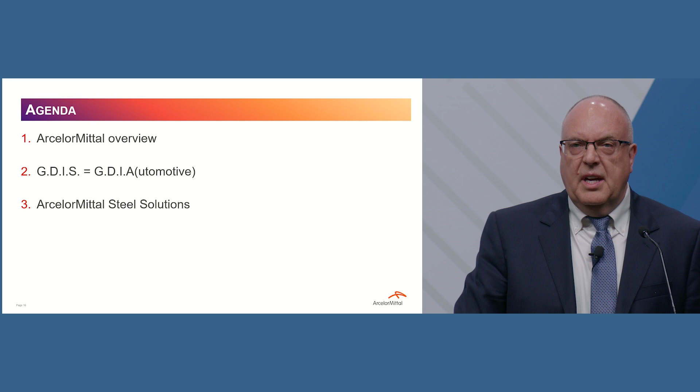So let's jump right in, I've got a lot of material to cover. Three main topics I want to cover today: a very brief ArcelorMittal overview for those who don't know our company; why we strongly believe great designs in steel are great designs in automotive, and that steel will continue to be the material of choice. I'm probably preaching to the choir here, but I'm sure some of you are challenged to look at other solutions, and we want to emphasize again what we offer in steel. Lastly, I'm going to spend a lot of time on what we do at ArcelorMittal. We believe, and we are, the leading technology provider in the steel industry, and I want to talk about all the solutions we're providing for our great customers.

Okay, so a little background for those who don't know us. We are still the world's leading steel and mining company. We have manufacturing in 15 countries, and we sell to more than 140 countries, 58 million tons. Now this is crude steel—I'll highlight this because I'll talk differently in a second. That 58 million tons doesn't include our large joint venture in India, which isn't consolidated. That would be another 8 million tons of crude steel, and it contributes to our other results because it's a strong performing asset.

We've got a lot of employees worldwide, more specifically 14,000 of them in North America. You can see our financial results are strong, our debt is low, and even with significant capital expenditures these days, we're generating $2.9 billion of free cash flow. So we have the ability to support our customers and work on all the technologies you need.

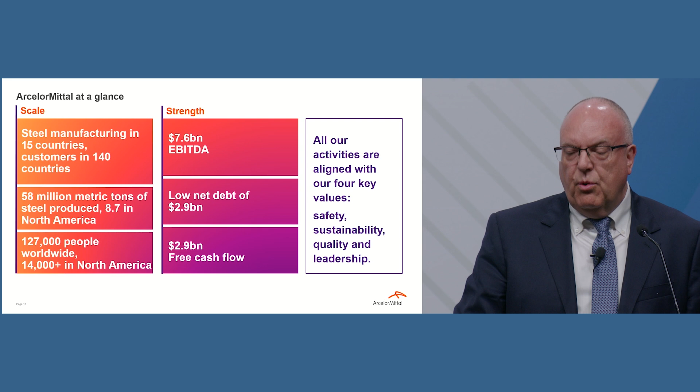And I do want to emphasize, because this will come across through everything we do, our four key values of safety, sustainability, quality, and leadership.

Okay, so if we look at the things that really drive us forward—I mentioned sustainability a second ago. We do have a group-wide net zero target. You can also see our global 2030 targets for CO2 reduction, and more specifically in Europe, where we are leading in decarbonization. Health and safety is our #1 priority, and it has been since our inception. And there's a 2030 target to double the number of women in leadership positions to greater than 25%.

Now on the innovation side, this is where we believe we really separate ourselves from the competition. We have more than 100 R&D programs underway as we speak. More than 200 trademark products existed from our company in 2023, and 38 new products and solutions were launched. We're launching at the fastest rate we ever have. People think steel is a mature industry.

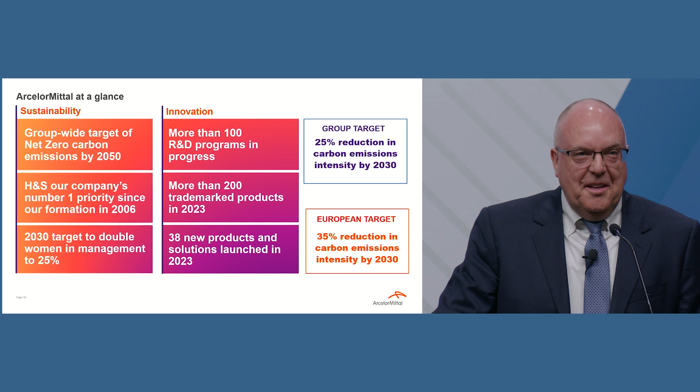We're proving it's not. Now I want to talk a little bit specifically about North America. I covered some of these facts a second ago, but it's a little funny—I think in last year's conference people were talking about our demise in North America, or maybe our exit, and I want to emphasize nothing could be further from the truth, okay? North America is a critical market for us. We may have sold some assets, but we're reinvesting, and I'll talk about that in a second.

We've got 14,000 plus employees in North America, and on the shipment side, we do bring some slabs into North America to finish because we have more finishing capacity here. We shipped 10.6 million tons last year.

So if you look at some of our major assets in North America: we have a joint venture, a very large steel plant in Alabama. We have ArcelorMittal Dofasco in Canada, again a very large and auto-focused steel asset. We have ArcelorMittal Mexico, which has been making a lot of high-strength slabs for our other operations, but we've invested to go downstream into hot roll products, and we're studying further investments as we speak.

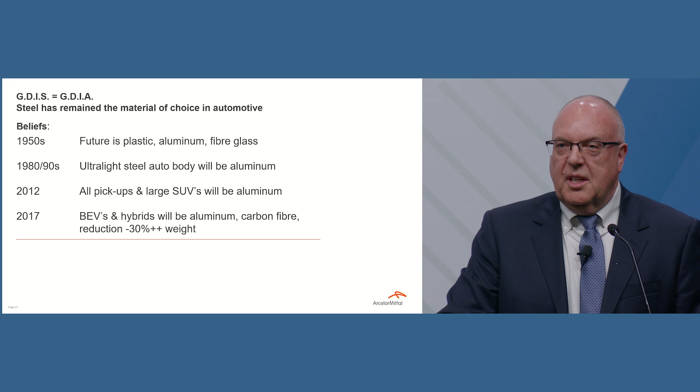And then, of course, I was on another auto body conference in 2017. It was quite an entertaining one for me, being the only steel guy there. But there was an aluminum company and 3 automakers, and all of them were emphasizing how vehicles, especially BEVs and plug-in hybrids, had to have 30%, 40%, even 45% weight reduction in order to be a good design. And I was just amazed at some of the exotic solutions they were coming with. Only 2 years later, the German OEM at the table sold their carbon fiber subsidiary, and none of these weight reductions came. Steel delivered them significant weight reductions at more cost-effective abilities.

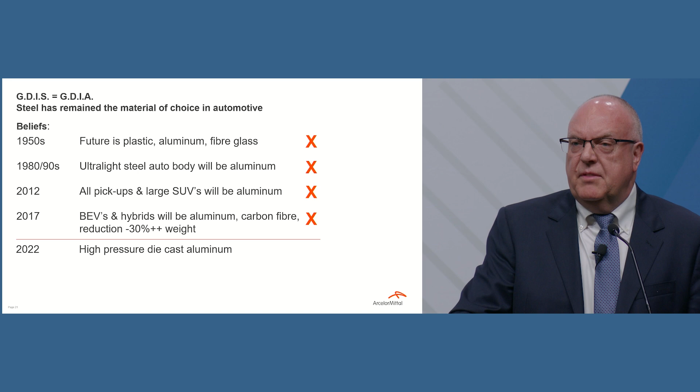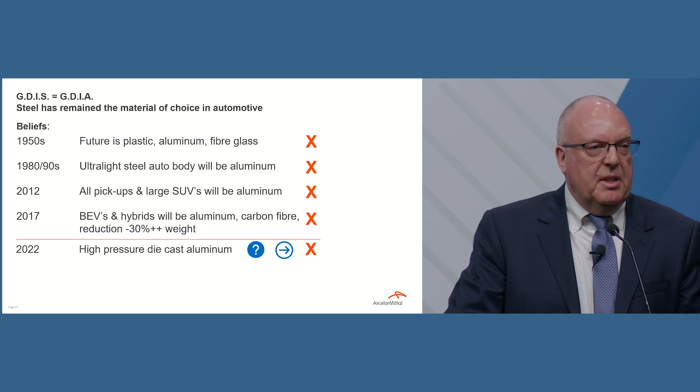So we've been able to fend off all of these competing material solutions over the years. And of course, there's always one coming. So here we are today. Many automakers, especially for BEV vehicles, are talking about high-pressure die-cast aluminum. What do we think is going to happen? Well, we're here today to say that the steel industry has the technology and the responses, and that if we look back maybe 5-7 years from now, you will see once again that steel remains the material of choice in automotive. So all of those challenges over the years, steel still makes up, this is our analysis, it's aligned with experts globally, more than half the vehicle content.

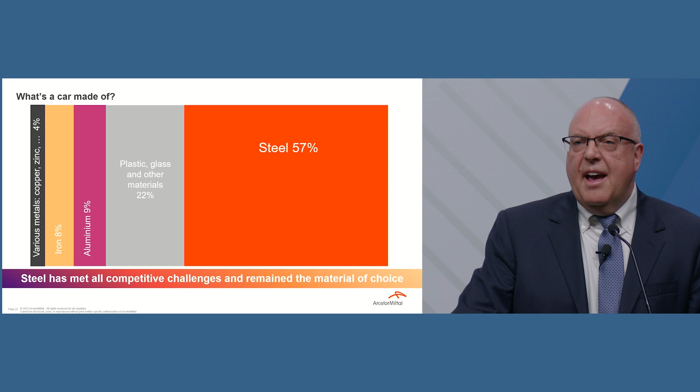Okay, so automakers, we realize we have to understand your challenges if we're going to have good solutions for you. The transition to BEV brings a lot of challenges. It brings a lot of opportunities as well. So obviously we're all aware of the increased mass. We're aware of what that means in a crash. It means we have to protect the occupants, but now we also have to strongly protect the batteries. We have to absorb all that energy. It's a very challenging vehicle design to come up with, but it also has opportunities.

The skateboard design gives you the opportunity to assemble differently. It gives you the opportunity to assemble in a more modular fashion. And these are some of the opportunities we know that all the automakers are studying. And you're also looking at all of the technology you put in these vehicles, which is massive and very expensive, and the fact that as we come to more autonomy, you will redesign the interiors to give customers more of what they want. So this is a very, very challenging time for automakers, maybe the most challenging time in history.

But we realize that your biggest challenge with all of this is to meet these goals in a cost-effective way. And that's where steel is going to continue to be your answer.

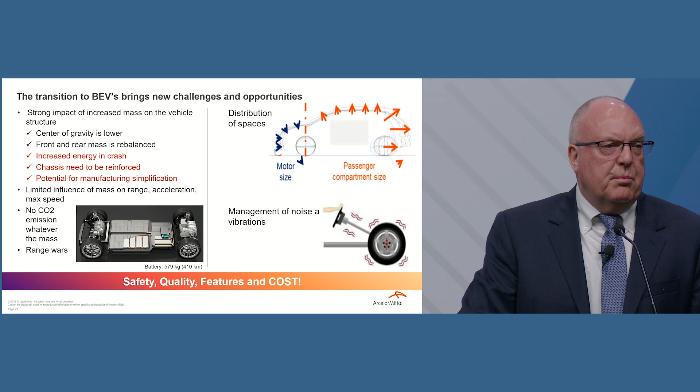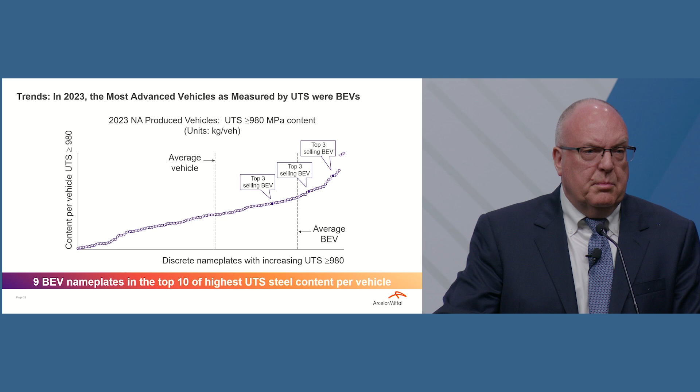Okay, we're going to share with you a little bit of ArcelorMittal data here. So if we look at these vehicles that are being produced today, this is 2023 data from our company, and we look at some of the trends. If you look at the trend of high-strength steel that's in a vehicle, what you find is that 9 of the top 10 vehicles with the highest utilization of high-strength steels are battery electric vehicles. It's not a surprise, given the design challenges we just talked about, and given that automotive designers are spending a lot of time making these the most modern vehicles possible. But it does explain that automakers see the value in the high-strength steel solutions.

The next slide I want to show you is looking at press-hardened steel only. Now, obviously, press-hardened steel is very strong steel, so it aligns with the last message I just gave, which is lots of high-strength steel in the vehicle. But the press-hardened steel also comes to laser-welded solutions. And there's a lot of laser-welded high-strength solutions being adopted by these vehicles. In fact, it's running 50% higher than the non-battery electric vehicles.

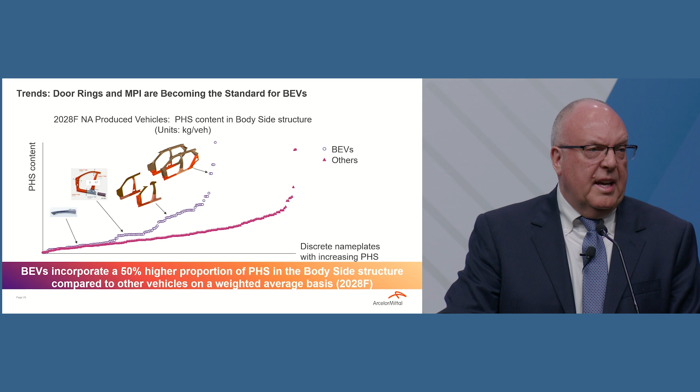And certainly the third trend that we're seeing is the adoption of aluminum die casting. Now, aluminum die casting, once again, is not a new technology.

If you look at your vehicles from just 20 years ago and measured the highest strength steels in those versus today, you would find the highest strength steels today are 3.5 to 5 times stronger. That's why steel is winning this competition of materials over the years, because we've been able to reinvent ourselves and improve the qualities and capabilities of our product. The other materials are older too, but of course they're being used in new ways.

That's the attractive part. But if we look at this, the attractiveness of die-cast aluminum is all around part consolidation and manufacturing simplification, which is further enhanced because you start with a skateboard design. That leads to some assembly line CapEx savings, which of course are very valuable for automakers.

Now, the disadvantages—there are quite a few, and that's why die casting hasn't been as extensively used over the years. When it comes right down to it, the part costs themselves are higher. If you're not offsetting it with manufacturing savings, then you're going to end up with a higher cost design, or maybe no cost improvement.

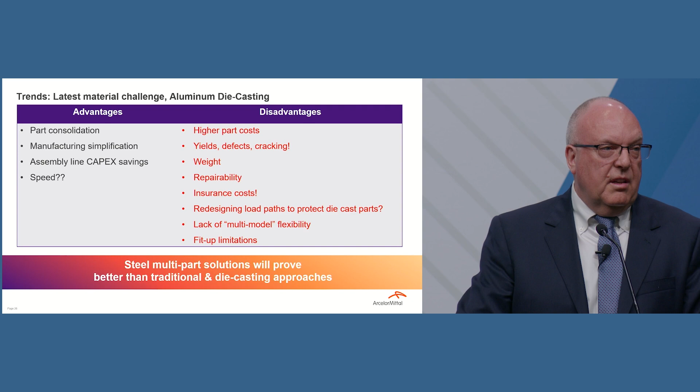So this technology has some benefits, but its negative aspects need to be very closely looked at, and that's why we think steel can succeed.

Now, I'm going to jump into what ArcelorMittal is doing, but you probably need a little more foundation first. Over the years, we've had the largest and most global portfolio of products, but we've also, over the last 10 plus years, invested heavily in our engineering capability so that we can sit at the design table with automakers. I mentioned that we've been involved in many designs to prevent them from going to alternate materials, and we're proud that we're bringing value to the auto industry.

We also have a lot of experience working with battery electric vehicle manufacturers. You'll probably remember that the first vehicles were aluminum intensive, and now what you see is battery electric vehicles are steel intensive. We were at the design tables with those automakers on their new generations, to prove to them that a steel intensive design was the better way to go.

And then lastly, many automakers start with an aluminum intensive battery box, and we're working with automakers every day to move to a steel intensive battery box. We're seeing those transitions—in fact, we're seeing some automakers committing to all steel battery boxes. So we're winning back applications from aluminum, and this is what our technology and our efforts can do.

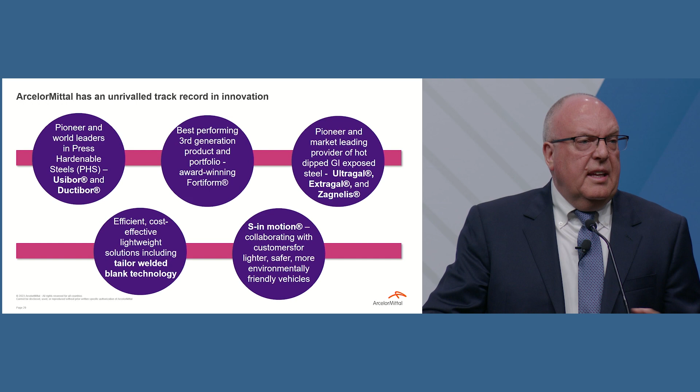We're the pioneers of hot dip galvanizing for exposed products. We've got our tailor welded blanks divisions around the globe now—I'll talk more about that in a second. We've always packaged all of these solutions into vehicle designs so we can demonstrate to automakers, for each class of vehicle, the designs and technologies that give you our thoughts on what the steel industry believes is the best part, the best location to use each of our grades of steel. At least it's an input that automakers can use.

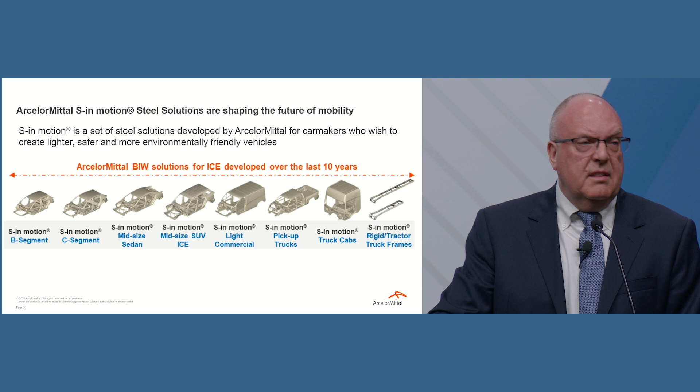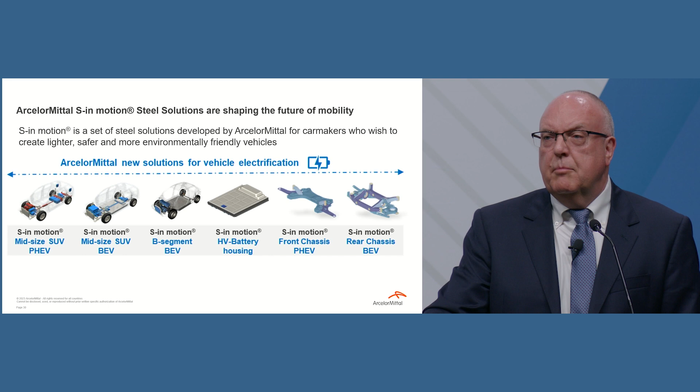We've historically had a full catalog of solutions for internal combustion engine vehicles, and now we have almost a full catalog of solutions for battery electric and plug-in hybrid electric vehicles. But I want to focus a little on multi-part solutions, because they are the answer to aluminum die casting, and they're also the answer to improving the cost structure of battery electric vehicles as we go forward.

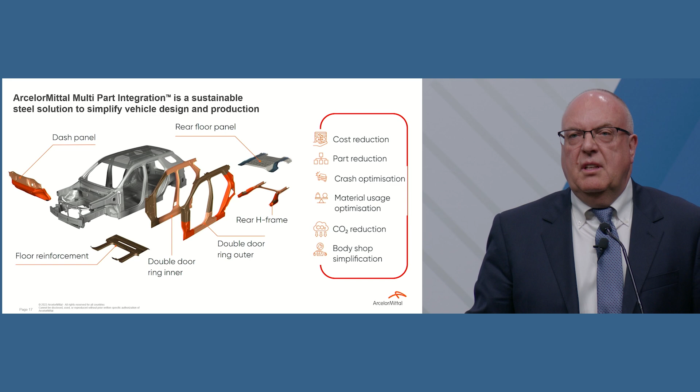On the right-hand side, I want to show you our efforts as a company to prove to automakers that these steel solutions can help them. We knew if we showed up and said these solutions will lower your manufacturing costs and help you on part costs, the auto companies would be a little skeptical of the steel guys telling them what they should know about their manufacturing. So, of course, we brought in experts: Bertrandt and KUKA, globally well-known suppliers to the auto industry. They did the analysis, and they're more than pleased that we put their name on these results. They went through extensive analysis.

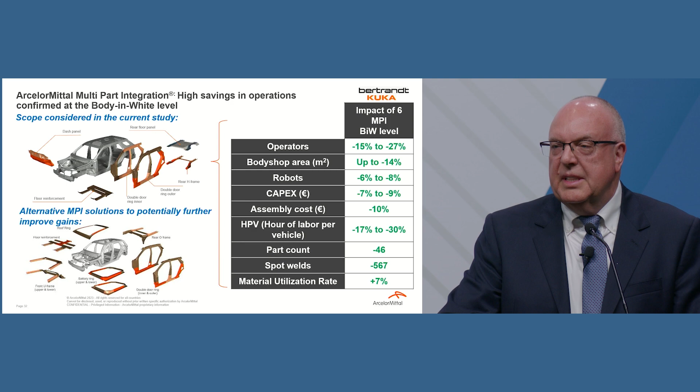This is only a summary table—if you want more details, reach out to your ArcelorMittal technical reps. But you see that our multi-part solutions had significant reductions in the number of operators at assembly, the body shop area, the number of robots, CapEx, assembly cost, hours per vehicle, part count, and reduction in spot welds. Then, through optimizing the way you can with these multi-part solutions, there was an improvement in material utilization rate. Now, we didn't just stop there.

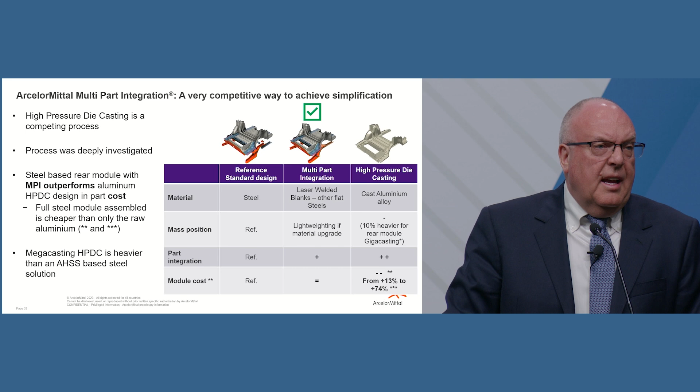That analysis looks at traditional single-part manufacturing and the improvements we would make. This is a little less quantitative, but again, contact your ArcelorMittal technical rep for more details. We've now compared the multi-part solution—this is showing the rear underbody solution where die-cast aluminum has been used the most. We take the reference single-part design, compare qualitatively the steel multi-part to it, and then compare the aluminum die-cast. The big results are that the aluminum die-cast is heavier and more costly, as we talked about. Again, we can share some of these details from our detailed analyses.

So it's great to have a technology for auto companies, but can we supply? Can we meet your needs? You're building global platforms now that you're trying to really optimize, and yes, ArcelorMittal can meet your needs around the globe. We have extensive assets in North America, Europe, China, India, and we've also just installed our first asset in Brazil, and we will continue to invest in all of these locations to meet customers' demands. We've also licensed a competitor in North America, and just this year we've already signed 3 licenses with Japanese Tier 1 firms—one of which has gone public—and we have 3 more partners in Japan who are close to signing license deals with us.

So ArcelorMittal will license its technology to make sure that customers have the solutions they need around the globe. Now, this is some data you won't see. This is data that we've not published before, but you know, it's nice to have the technology, it's nice to have it around the world, but are people choosing it? Do people agree with us? I can stand up here and talk all day, but if customers don't buy it, then it's not the best solution. Well, here's what's happening in the market.

If you look at our press-hardened laser-welded blanks only, we do other types of laser-welded blanks, but if you look at only our press-hardened steel, laser-welded blanks, we'll ship more than 30 million of them this year. And we've been growing over the last 5 years at a compound annual growth rate of 18%. That's pretty good in any steel or auto business. So you can see that this technology is being adopted very broadly and quickly.

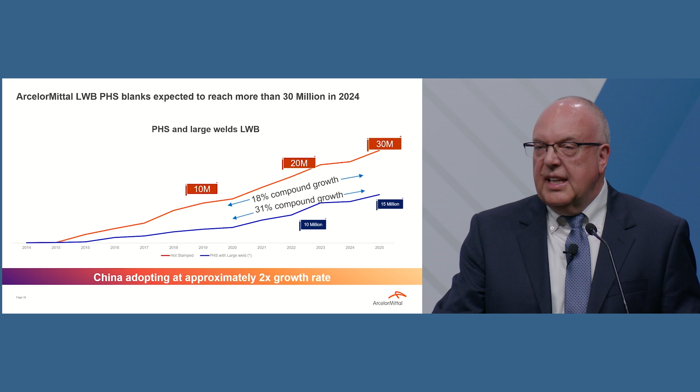Now, the only last point I want to point out, there's been automakers who've talked that some of their biggest fears are the Chinese automakers and how fast they're advancing. I want to tell you here today that China is adopting these solutions at about 2 times the rate. I'm not talking numbers, we know their industry's big, I'm talking rate. 2 times the rate of the Western world. So they are really seeing the value in these solutions, and everyone should be aware of that.

Okay, so we have technology, we can offer it globally, customers are adopting it and liking it. That's not enough. We've got to drive down the costs. Now, this is a busy chart, you can study it later, we'll leave this with you. But in the upper left-hand corner, it shows that our laser-welded solution for press-hardened steel was a 4-step process. It needed ablation offline. We are in the final stages today of fully integrating with our partners and suppliers the technology, newly patented, for all inline. We're going to take out that offline step.

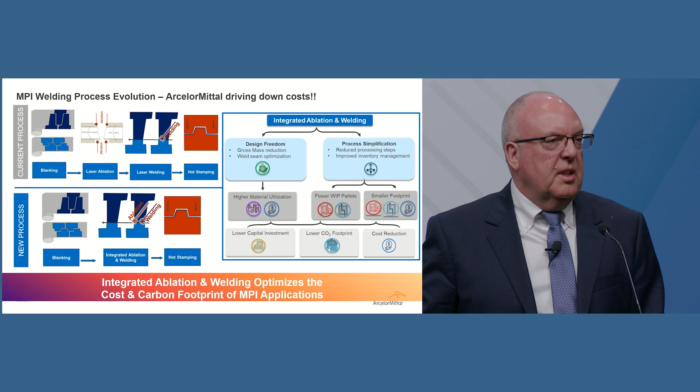We're going to drive down the costs. And while we think it's already the most cost-effective solution for you, we're going to drive them down further. We know this is what you need for your cost challenges, and that's what we're committed to do. Okay? You won't see this from the aluminum die casting. Sure, people are working on tooling life, but this is something that we're doing on the steel side. Now, I've talked a lot about multi-parts. I'll just give you a couple last comments before I finish.

We're bringing out still new generations of hot stamp steels. We've heard from customers. I was in Germany just a few weeks ago, and one customer said, I need higher strength, higher energy absorbing press hardened steels. Well, Ductibor 1500 is launched this year. It has the strength of Usibor 1500, but it has the energy absorption of Ductibor 1000. Again, it's a highly valued product.

We can show you where we think it's best in a vehicle as a starting point. It does have some advantages in some locations. It's not meant for every location. But again, it's a new product, and we will lead the world with this kind of steel available and maintain our broadest product offering.

If we look at electrical steels, we are going to commission in Europe, in France, by the end of this year. And you know that we've got Department of Energy funding, and we're seriously looking at an investment here and elsewhere around the globe. ArcelorMittal believes it has leading technology for electrical steels, and we will be a bigger player in that market.

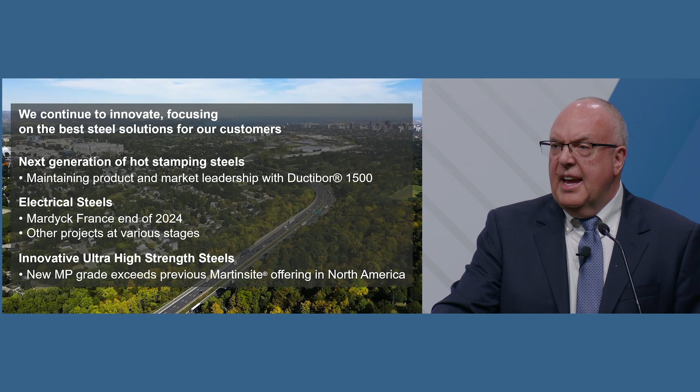And then lastly, in North America, when we did sell some assets, we lost our martensitic product. We've introduced a new martensitic product, and it is superior to the old one in that it has increased flatness and it performs much better at our customers' plants. So with that, I do want to emphasize that we think great designs in steel are going to continue to be great designs in auto, because steel will be the material of choice.

I want to emphasize ArcelorMittal is committed to finding solutions for customers. If we're not giving you all the right solutions, tell us and we'll get busy. And then lastly, we understand you have to study all of these competing solutions, but we think you're going to come back to steel in the end.